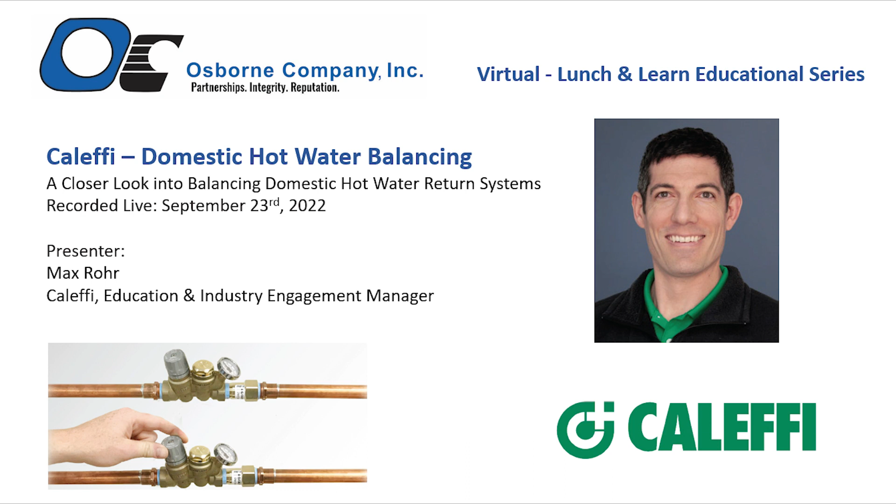One of the things I'll mention off the top is a couple other resources related to this topic. This idronics Trade Journal is a free trade journal we have. You can get these shipped to your house, or go to idronics.caleffi.com and see an interactive version where we add videos and things like that. These are great resources on the topic.

So just basic domestic water heating. Issue 22 is mostly on mixing valves, and 21 is the topic I'll cover today on balancing valves. Another resource is Coffee with Caleffi. This optimizing mixing valves in a DHW system was a good webinar we did last year. Actually this month, the last Thursday of the month, we're going to do a deeper dive on the electronic mixing valves with Coffee with Caleffi, so sign up for that one as well.

One of the things I like to mention is we do have BIM files modeled in Revit, so they're light and won't crash your computer when you open them up. They also have some calculations built into them, so I know that's not always used to figure out your delta T or something like that, but we're trying to stay ahead of the game a little bit with our Revit files available on BIM Object or on our website. We're also in MasterSpec if that's useful to you. We've got all of our products there specific to North America, and we've got international products on there too.

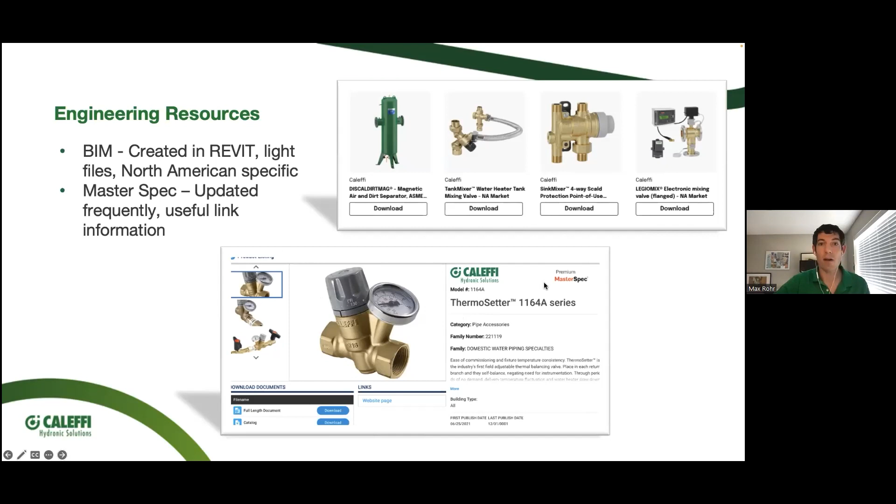So today we're going to talk about DHW Recirc. We'll go over a little review of what's happening in the mechanical room. We'll talk about the different styles of balancing valves - all of these valves will end up doing the same thing. We've had long conversations with engineers that you can balance a building based on flow, or based on temperature, and really if you do it well, the occupant won't know, and you're going to save water and save energy in the process. It's just a few different ways to do the same task. Then I'll talk about how this can be used for thermal disinfection, and we'll cover a couple projects.

So to start with, I'll recap. This was a series of products. We talked last week about the LegioMix electronic mixing valve as the heart of the system, that's going to send hot water out into the building at the temperature we want, or elevate it for thermal disinfection, which I'll talk about at the end of the presentation. Then the balancing valves we'll cover today, and point of use mixing valves. Those three products helped us win one of three finalists for the AHR Innovation Award in the sustainability category, which was kind of cool.

That's specific to California, where you're trying to balance energy use as well as water waste, because water's such a valuable commodity there, versus Michigan or somewhere, where they don't really care if the wait time to a tap is a little bit longer, as long as the code allows that, because the water's just not as scarce for them.

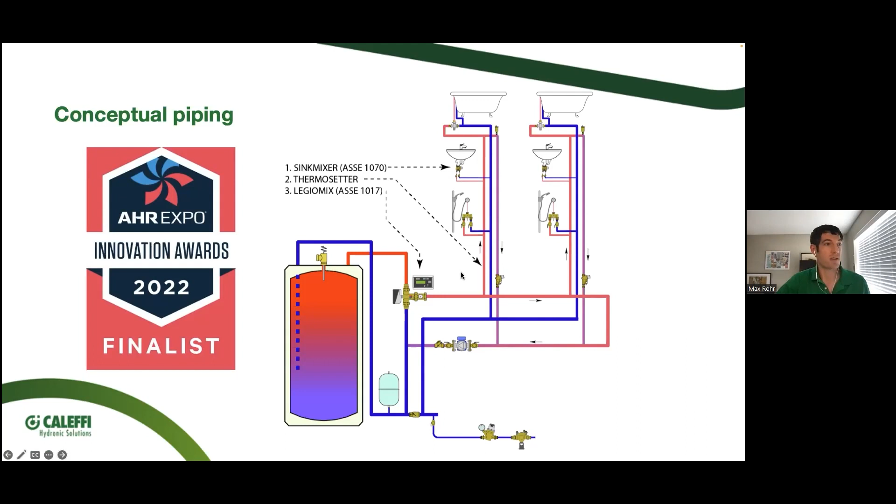So this is the best way to balance the energy efficiency of the equipment, so we're not heating water just to dissipate recirc energy that's unneeded into the space, while also making sure there's a short wait time at all the fixtures to get the hot water that we need.

This is an example riser in a commercial building. We've got a balancing valve on the return of the hot water recirc loop, and we can do this with really any of the balancing valves on the page here.

There are a couple other competitors that have been around with kind of generic names. People will ask us if we have a circuit setter - that's the B&G trade name. We do. This flow set valve has the same performance as a manual balancing valve. And in between, we also have a fixed Venturi valve that I'll talk about a little bit longer. A newer one on the market is the circuit solver.

This is a thermal balancing valve, and we'll go into a lot more detail about that. It's kind of a different way to approach the same topic.

Basically what we're trying to do is make sure there is equal opportunity to get hot water at each of the fixtures throughout the building, because water is going to take the laziest way back to the mechanical room - it might just be straight up riser one and back, while the rest of the building could be waiting a really long time to get hot water, which we don't want.

Hey Max, just because it's on this picture and it's a newer thing, you want to point out the plumb vent? Yes, so the plumb vent is right here. We have this listed for hot water use, for potable water use, air vent.

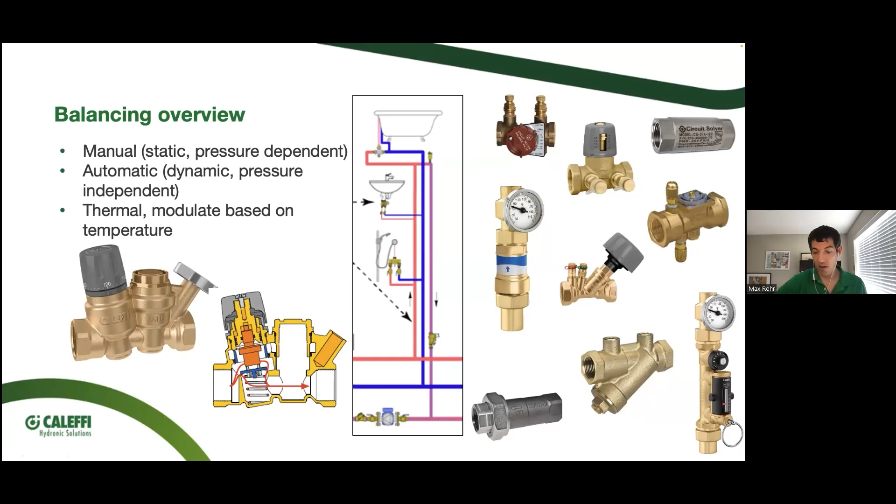We want to make sure that all of these fixtures can see whatever our temperature is - if it's 110 degrees or 120 degrees, we can figure that out theoretically and use any of the flow-based balancing valves. But really what we want to do is make sure the temperature is correct, and thermal balancing valves can be a nice way to do that automatically without the need for additional balancing or specific charts and things.

So historically, a manual balancing valve is what you're going to see in the field most of the time.

This is what we've used for hydronics applications and for plumbing balancing for forever. These are kind of the original balancing valves. B&G's done a really good job of paving the way for that type of product in the past.

So you'll see many, many competitors in this world for a manual balancing valve. It's going to be the lowest cost. So sometimes in a value engineering scenario, we've spec'd a different balancing valve, and then the engineer comes back and says, okay, we're VEing down to the circuit setter level of balancing valves.

And that's how it goes. Sometimes you can still make this work, but the argument I'll try to make over the course of the presentation is that's going to be the lowest purchase price for a balancing valve to put on each of your 8 risers or whatever. It's not going to be the least expensive installed cost.

I live in Utah, and it's not nearly as bad as it is in California, but it depends on what your labor rate is, and how much a balancing contractor charges per hour to balance those 8 valves. There are some cases where the installed overall total cost of a manual balancing valve is going to be a lot more expensive than it would have been to go with a valve that essentially balances itself and doesn't need that additional valve-by-valve balancing and rebalancing.

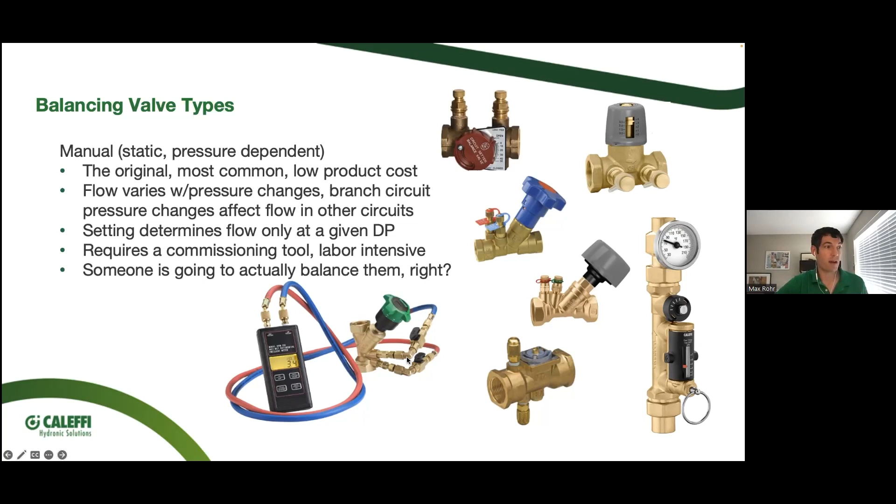So what you need is a manometer to do that. You've got an upstream and a downstream reading. I'll show you where those would be on these different styles of valves.

So there are some that are a variable orifice style, like the B&G circuit setter or our flow set valve that's in the Caleffi catalog. In this case, you've got a pressure port upstream and downstream of an orifice, and you use the adjustment knob to adjust it up and down, which changes the flow in between these two pressure ports.

And then the other style is a fixed orifice, a Venturi style. In this case, you have the upstream and downstream pressure port on the Venturi, so nothing changes in between those ports. You're going to use this almost like a globe valve style adjustment knob that's downstream of that to make the adjustment. So it's a nuanced thing, but the variable orifice has the orifice between the pressure ports, and the fixed orifice has it after you've gone through the Venturi and done your reading.

So the third style of manual balancing valve in our catalog, and one of my favorite products for both hydronics and domestic hot water, is the Quicksetter Plus, which is listed for DHW applications. It's essentially just a manual balancing valve, and it's more like the fixed orifice style. You've got your Venturi right here, and then your manometer reading your two pressure ports upstream and downstream of the Venturi, but it's just built into the valve.

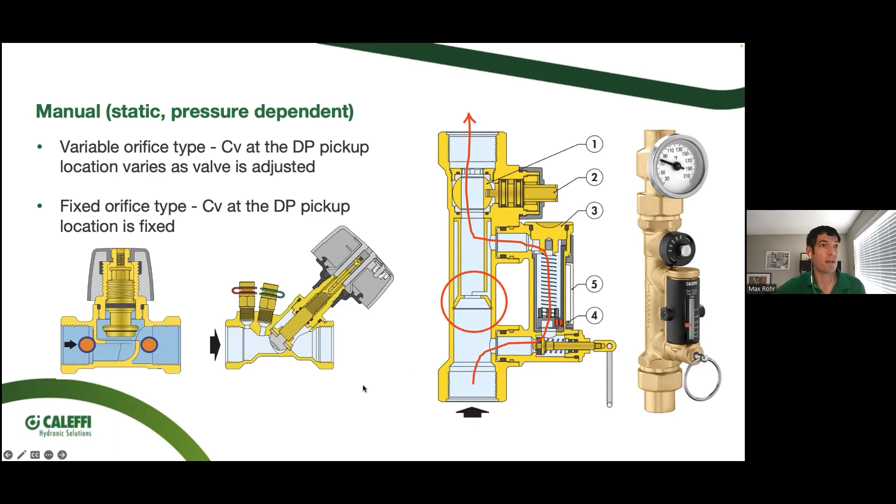So it's not changing anything external other than turning that ball. One thing I forgot to mention is that manual balancing valves are a great pair for an ECM recirc pump, because one of the things that's tricky about a fixed speed pump with a manual balancing valve is that curve. With an ECM pump, you could say I want to flatline it at X pressure, in feet of head or PSI or whatever. So that does make all of the balancing with these manual balancing valves easier if you can flatline the maximum pressure, because the flow rate may change, but the pressure is going to be more fixed, which is a big helpful way to commission these systems, and won't make it so wild to make changes to a manual balancing valve based on flow rate, if we can keep the pressure part consistent.

Okay, so the next type of balancing valve I'll talk about, and I think this has been a great fit in the California market as well, would be an automatic pressure independent fixed GPM balancing valve.

The way this valve works is that as water comes through it at higher pressures, it's going to compress a spring, and this little cartridge slides back and forth based on the pressure. As the pressure increases, it's going to push that little shuttle, and close more of this, like half of an hourglass orifice, down. So if it's low pressure, under 2 psi, it's just going to be wide open, letting water go through that entire Y-shaped orifice and the little pinhole there. If for some reason, maybe because the pump size is wrong, you're at like 32 psi across this valve, which would be bad, there's something else that needs to be addressed. It's pushed this spring all the way down, so there's just this little pinhole that water is going to flow through. It doesn't close completely, but it's going to modulate the orifice with the pressure.

So if we look at the chart on the right here, in this example with one of these valves, under 2 psi the flow rate is going to be up to, we'll say, 2 GPM. And then when we get to that 2 PSI we've developed, it's going to flatline that flow rate to 2 GPM all the way up until it's above 32 PSI. So this really is helpful - assuming you're in the ballpark with your pump size, it's going to give you that exact flow rate that's on the sticker on the cartridge at every riser you put it in.

So we also have this version, which is the same automatic balancing valve, but you can pull the cartridge out here without having to crack the unions and take the whole valve body apart, and also clean it out. So it's just a little bit easier to service. And if you did have to change the cartridge, you're just doing it through the Y.

One of the things we talked about before the webinar is that in some jurisdictions, for the balancing report, you have to have a different balancing contractor come in and say, here's the pressure upstream and downstream, and here's my balancing report. You'll find that 99.9% of the time, if the pump's sized right, it's going to be exactly what that cartridge is set to, if you look at the chart. But in some jurisdictions, you have to be able to test it, where this is not testable.

This will work the same and flatline that GPM, but you'd have to put in your own upstream and downstream pressure ports, Pete's plugs, to do that, where we built all that into a kind of Y body style too, that you could still get with the ball valves. I think isolation might be required by code in some spots out there too.

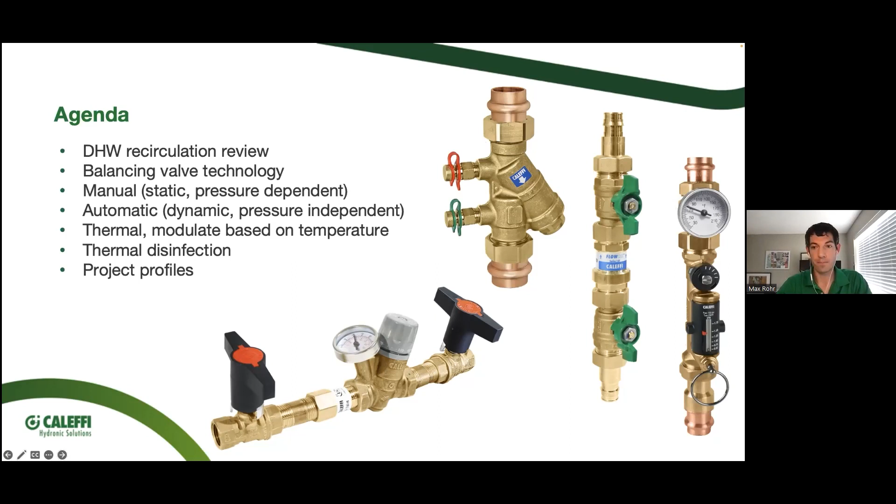And then the stem extensions. So yeah, we like the isolation valves because we view it as a serviceable component. You don't want to have to drain an entire hot water loop just to service your balancing valve.

And then another thing you mentioned a second ago, so if you're using PEX, specifically the Uponor PEX that Osborne is the rep for, there are different categories of chlorine exposure essentially. The Uponor is a category 5, which means you can do 24-hour a day recirc of up to 140 degrees, and like you mentioned, that 2 feet per second. Where other categories of pipe, like category 3, is going to be 140 degrees for half of the day. So that's a little bit harder to calculate, still achievable, but that's what we're talking about with that constant high temperature recirc.

If you were going to do thermal disinfection, saying you know what, we're just going to do 160 degrees 24/7 for the rest of the life of this building, that is still excessive, and you wouldn't want to do that. I'll cover how you could do that better with the next style of balancing valves. But the category of pipe, you could use a cartridge and figure out the math. We don't want 140 degrees all the time. If it were a different piping material, we want X, and find the right cartridge for that. And again, the Osborne guys will help you size the recirc pump perfectly for whatever you're doing.

This is almost like a safety factor to say that no one can go in and change the program of this pump or put in a bigger pump and ruin what we spent all this time doing. It's like an insurance policy that the velocity is not going to exceed what the pipe is designed to handle. Just relying on the pump, you could have a change in the future that could throw that off, which we don't want.

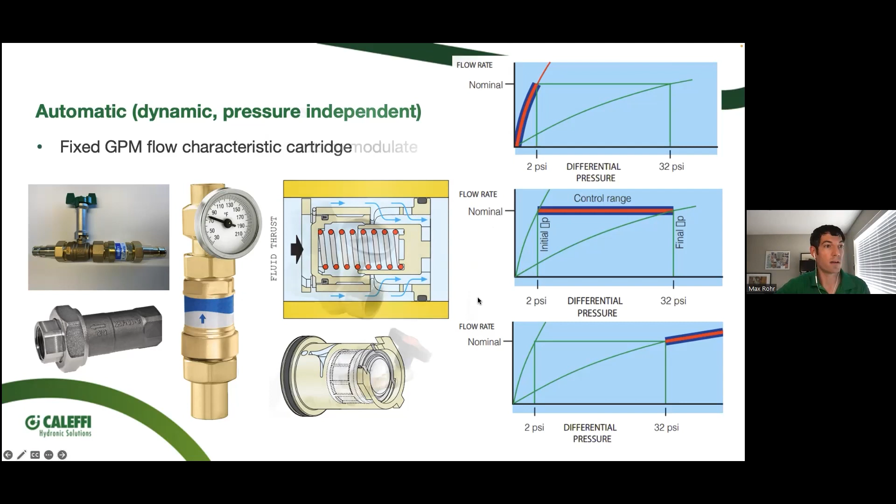The next style of balancing valves, which is kind of my favorite for DHW recirc applications, is going to be a thermal or thermostatic balancing valve. If you're familiar with the inside of a thermostatic mixing valve, there's a little wax cartridge that, as it heats up and cools down...

I have a hand up. Hey Matt, you still have your hand up, so I'm going to click allow to talk, but you don't have to say anything if I didn't notice your hand was up. Sorry about that, you can unmute yourself now, Matt, if you want to actually ask something out loud. I think you'll be the first person, please do it. People are usually too shy to talk out loud. Nope, maybe it was because... yes, I don't think Matt had specifically asked me a question. Okay, so I'm going to ignore the hand up for right now, I'm going to lower your hand. If he puts his hand back up, I'll unmute him.

So the guts of this balancing valve is this little thermal actuator basically. It's going to change the length, the stroke, depending on the temperature. So what that does is it pushes the orifice up and down based on temperature. Everything we've talked about so far has been based on flow.

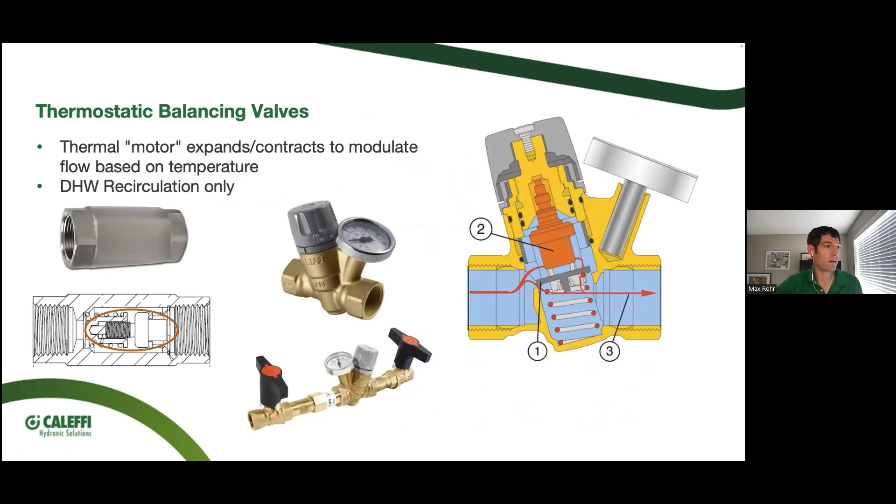So there's a question about tepid water for 100 degrees Fahrenheit. Our competitor in this space has advertised using these for cold balancing, almost like it's installed backwards in a sense, because what it's trying to do is have flow go through to make sure it doesn't get to that Legionella growth range, which I'll talk about in a couple slides, and stay there. So it wants to make sure that water isn't in the danger zone between room temperature and 100 degrees. It's something I'm not quite sure how that works in reality.

I think the intent is good. We haven't had that many cases where we've thought we should also do cold water balancing. It really is a jump in system complexity, and maybe not as much benefit for the complexity there. But that's kind of how you could use it for tepid water.

So there's not really a minimum flow rate. We'd have the chart that we could pull up that you could see for each of the valves, but it really varies the CV. As long as there's some movement through there, that valve with like 0.0001 GPM would actually adjust based on temperature. So if it was at 130 degrees and then the power went out, that valve would open all the way up to the maximum CV in that case, even with minimal flow or no flow really.

Okay, then, so to elaborate on why the ECM pump: if you generally would design a balancing valve with a fixed CV, that is going to vary based on the temperature per riser. So you would have to have a fixed speed pump that is okay with all of those. Again, we'll just say it's 8 valves having a CV of 0.23, and also all of those valves having a CV of 2.1.

Well, ECM is variable speed, so they're not confused. Yeah, and it could be a VFD, it could be some other variable speed as well. You could size for that. The ECM just seems to be the kind of prevailing technology along those lines, and maybe something that in the near future they just say ECM is the only technology we're allowing to manufacture, like they have done in Europe. That's part of the reason the price of those ECM pumps has gone down, is that Europe has basically banned fixed speed pumps the same way they've banned incandescent light bulbs. They say you need to be able to vary this flow with a much more efficient wire-to-wire technology than a fixed speed pump that's being basically throttled back down by balancing valves, which is just not a good use of energy.

So ECM, just in case anyone's wondering, is electronically commutated motor. A variable frequency drive is the same kind of thing. It's just a way to control the speed of the pump. So two different terms that pretty much mean the same thing.

It gets too far into the electrical engineering side of it for me, but you would use a VFD with a permanent split capacitor technology circulator. And then it's really a frequency change. It's not like we're actually modulating a gas pedal like an ECM pump, where you can only really variable speed a PSC pump to 50% or something like that. It's not like an ECM pump that can go down to basically barely moving any water up to full flow. It's just chopping it to kind of half performance of that pump, but it could still be oversized at 50%.

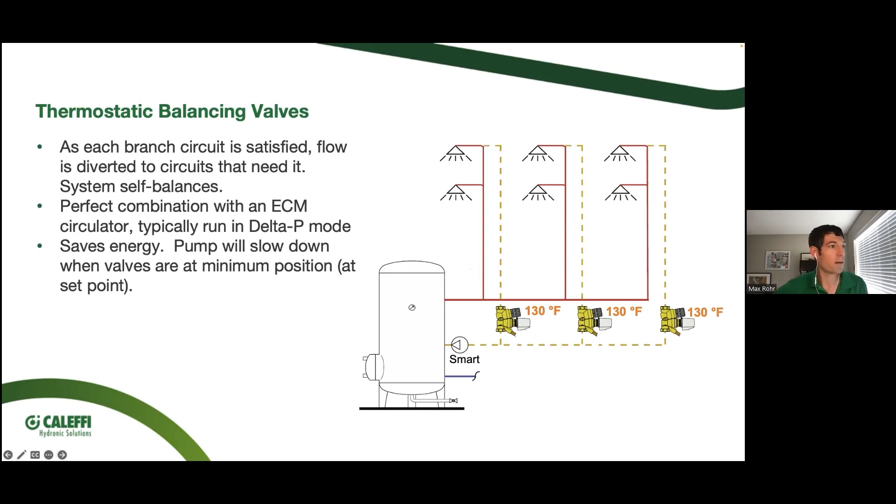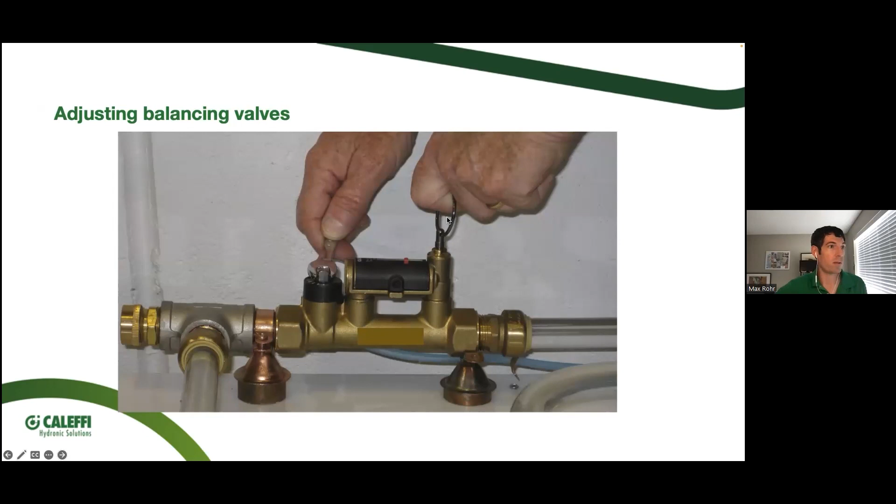Okay, I'm going to go through how to balance these valves. With this quick setter, you just take a wrench, and this guy's pulling the pin at the same time, adjusting the flow rate there.

A manual balancing valve like the flow set we show here requires the right chart for that valve, based on the valve size and unit. It's not like you can carry one chart for the day and be set, so there's a little more opportunity for error on the commissioning side. The biggest issue I see is on the contractor level, just not being used to looking at this style of graph.

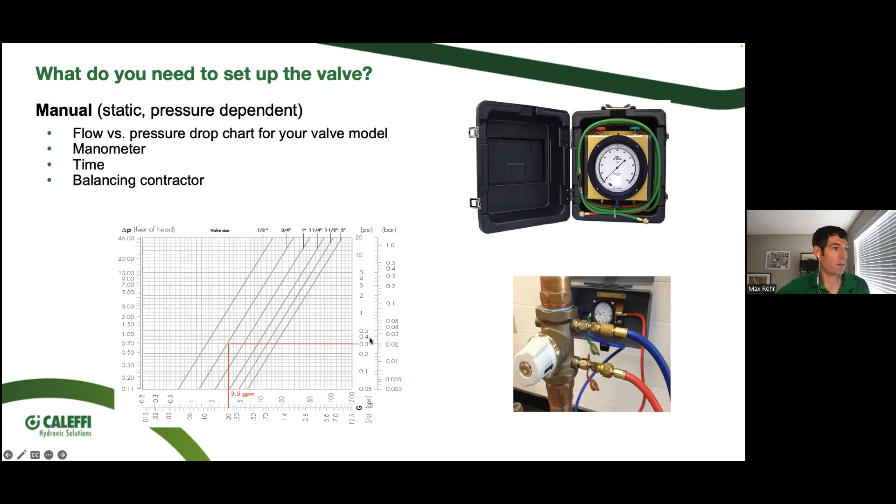And not realizing it's a log graph. So when you're using this, if you see these where the lines are not separated equally, your halfway point is not your halfway point. That can make a big difference on a bigger valve. So that's the only issue I see with these, sometimes reading them. People who do this all day, every day wouldn't need my help, but it's a little more complicated to get right.

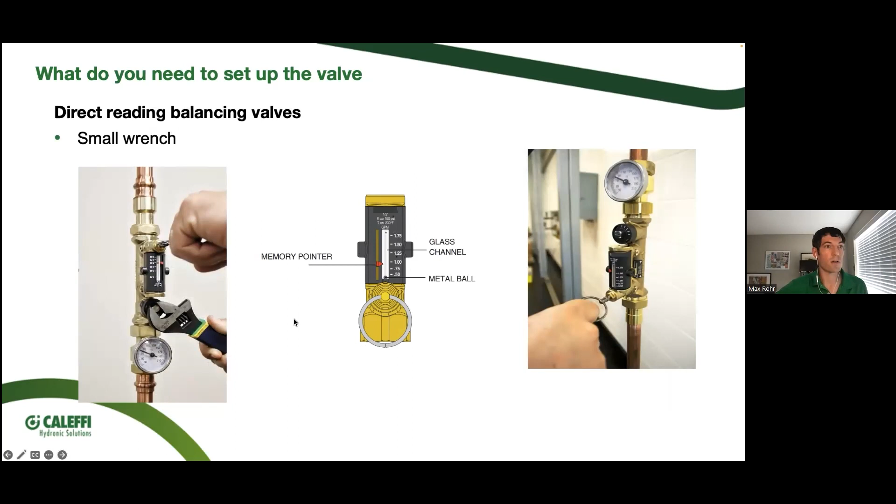So again, this is the procedure for the Quick Setter Plus, and that's what the gauge looks like from the front for a hot water application. The graph is going to be half to 1.75 in this particular size, where hydronics for that same size with a different velocity in feet per second would have a different scale. So hydronics versus plumbing will have a different measurement.

Then this comes up sometimes: some people want the ability to adjust the ThermoSetter temperature at any time, to say, if we can't get this riser balanced, we want to be able to just turn it from 120 to 125 and sort it out. Other places say we do not want anybody touching these balancing valves.

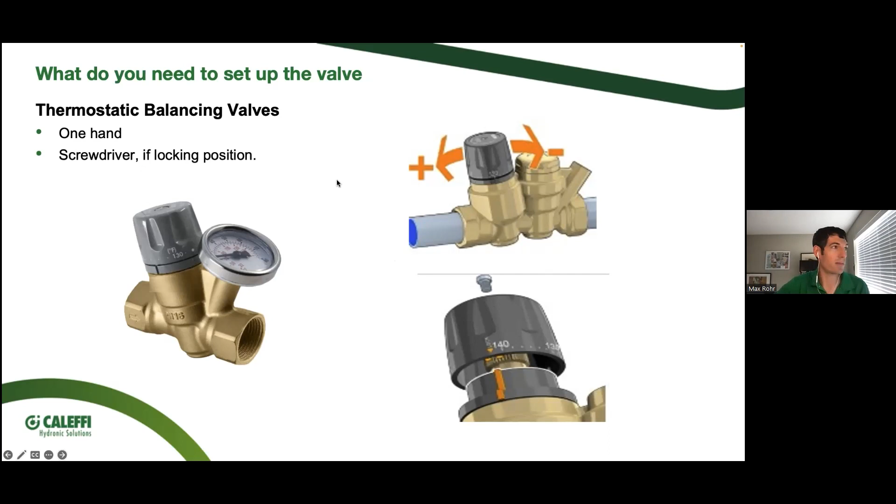So what you can do is take the screw out of the top, put the cap back on so it straddles this little piece on the cap, and then put the screw back in, and that locks it. We've done that before too, where before it's even installed, people will set the temperature on the tool bench, lock it, put it together, and then when installed you'd have to take it apart and remove the cap to change the temperature. Depends on what you're looking for there, sometimes that's helpful, sometimes it's the wrong direction, kind of depends on the use.

So adding additional circuits, you have to rebalance with the manual. It just keeps working as it was before with the thermal, and same thing with a manual with a variable orifice.

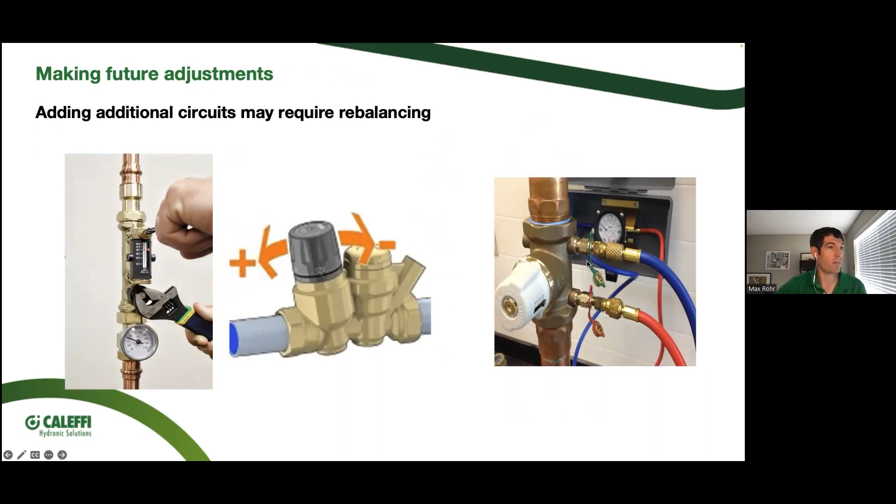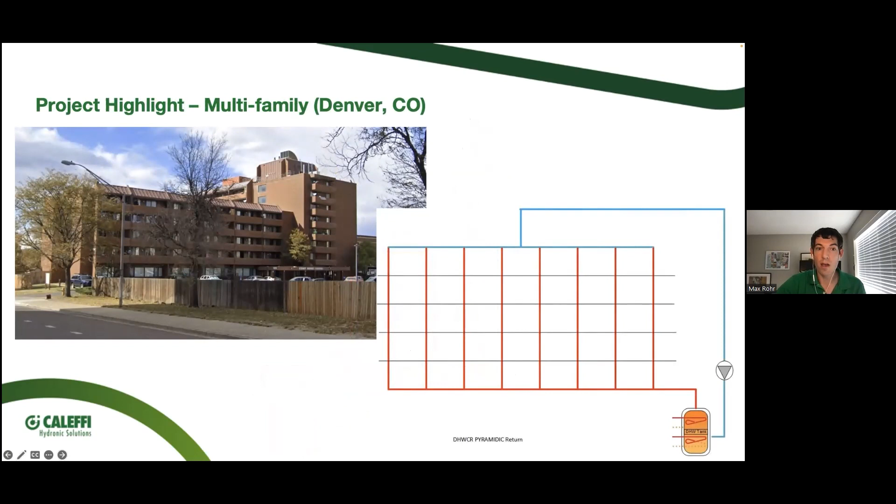So I'll cover a couple projects here, and then I'll leave some time for the Osborne guys if they want to mention something specific. I'm going to skip ahead since we already talked about a project like this, to a high school retrofit in Massachusetts called Mashpee High School.

If this goes into thermal disinfection mode, normally I'm doing 120 degree outlet, but for the next half an hour I'm doing 160 degree outlet temperature. So the first chamber of this thermosetter is going to say, that's too hot, I'm going to close down. That's the normal operation I've talked about with the valve so far. There's a second chamber here that's going to say, okay, we are now at 160 degrees, open.

So this chamber is going to let that thermal disinfection hot water through, and it can be toggled either with a 24 volt signal, or with just a wax actuator that's made to open at the high temperature. Then when it cools back down to 150 degrees again, it closes and goes back into normal operation with whatever you set on the dial. Two different ways to do the same thing.

We also sell this in the larger sizes. It just comes like this with a cap there. I like to call that thermal disinfection ready. So if at some point you install this Legio mixing valve and these thermosetters with a blank basically in it, that would be thermal disinfection ready.

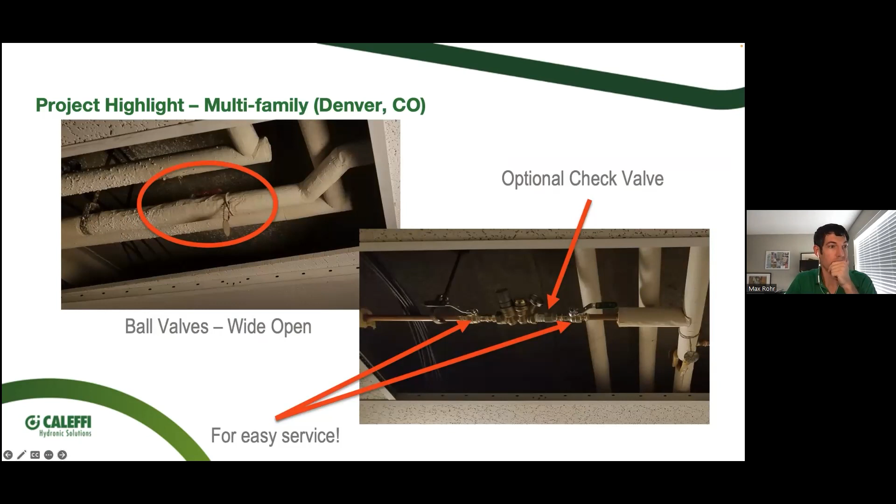And then there's that. Did you want to mention any of the projects you guys have worked on for any of the balancing valves we've talked about that are kind of specific to the market out there?

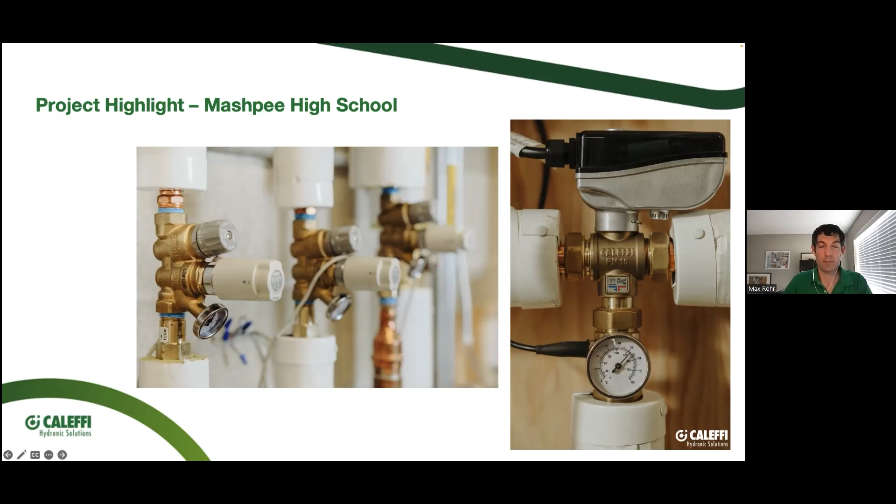One thing I was going to mention, just to make some people's lives a little easier - we had a hot water recirc system, and it wasn't really a balancing problem, but it looked like one because they were getting elevated hot water temperature back, but not hot enough water back. So they were very concerned the balancing wasn't correct, and that there was crossover somewhere. I did a site inspection for them and immediately knew what it was - they had undersized their pump, which is very rare. It's usually an oversize issue, but they had undersized their pump.

These poor plumbers had spent 2 weeks trying to figure out where their balancing issue was, because it was engineered for that pump. What it ended up being was the pump just wasn't big enough - they needed 12 GPM, and the pump they picked couldn't even do 12 GPM. I brought in an ultrasonic flow meter so we could test it and get an accurate read, and they were only getting 3 GPM. So in this situation, what I want is more flow, but that means I need more head, because you won't get more flow without more head.

But what could have saved them a lot of time - and they said they spent 2 weeks on this - is something very easy and actually nice to have even in the future: if they had just put a pressure gauge, or at least a tap port, before and after the pump, on the inlet and discharge. It was a fixed speed pump, but you can do this with a VFD pump too - you just have to know what speed it's running at, or set it to a constant speed when testing. The differential pressure across the pump will tell you the flow, just like differential pressure across any valve tells you the flow.

So they could have confirmed for themselves by just adding pressure taps at the pump. But they had circuit setters - the problem is they couldn't use their circuit setters to calculate the flow because they weren't getting enough flow. So it looked like there was no flow.